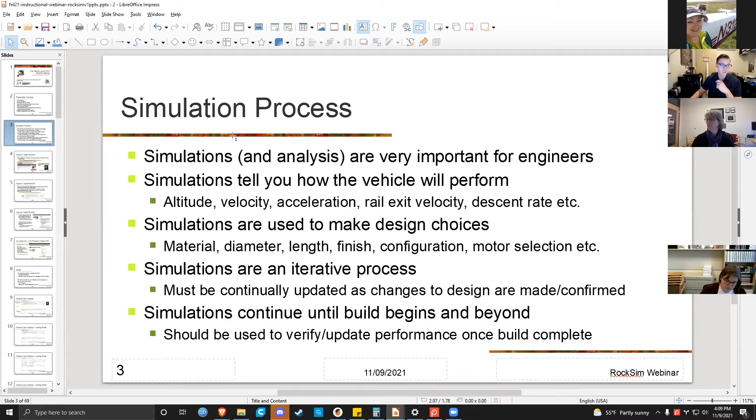So tools like RockSim are extremely useful for launching the rocket in simulation 10, 15, 20 times, and every time just tweaking something a little bit to hone in on the flight parameters that you're looking for out of the rocket. It makes it extremely easy to change things like the material, the diameter of the airframe. It gives you access to a wide selection of different motors that you can plug into the rocket and then just test at your leisure. So generally speaking, simulations are an extremely useful tool, and we are going to leverage them as best we can.

So, acquiring and installing RockSim. RockSim is one of two programs which help you simulate rocket flights, both at an amateur level, so like high-powered rocketry, like the rocket that I have currently sitting behind me right there, a 5-footer rocket. But it can also be used for very, very small model rockets too, the type of thing that you would pick up at a hobby shop.

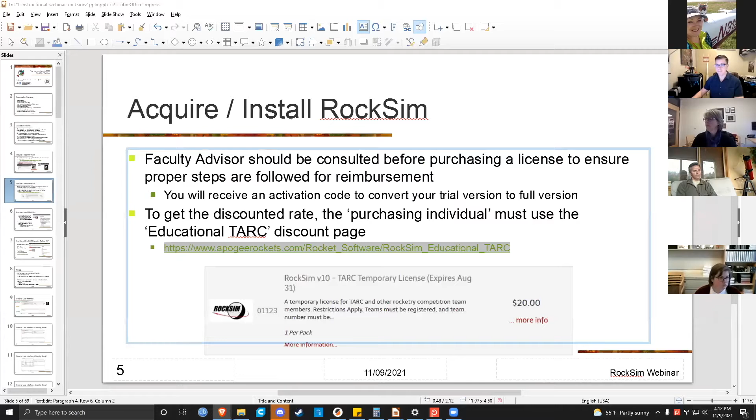So just for clarification, Trent, the license is effective from the day that you purchase it through August 31st of the following year. So these licenses will be good through August 31st, 2022. Okay, yeah, that's great. Thank you, Christine.

More information on downloading RockSim. If you're having any difficulty with this, as you work through that, please get in touch with your supervisor, get in touch with the WSGC staff. But it's a pretty straightforward download. And once you have that downloaded, then you'll be able to use it and play around with it at your leisure.

For today's demonstration, we are going to be using this Loc Precision Caliber ISP demo kit. So again, there's another link here in the slide deck that'll bring you to a page where this model exists and can be purchased. But what's great about this is that there is a database of pre-existing model rockets that we can go ahead and import into RockSim, and this is a fantastic model. I've built this once or twice myself, and this is what we're going to be using as our reference for interacting with RockSim over the next couple of minutes here.

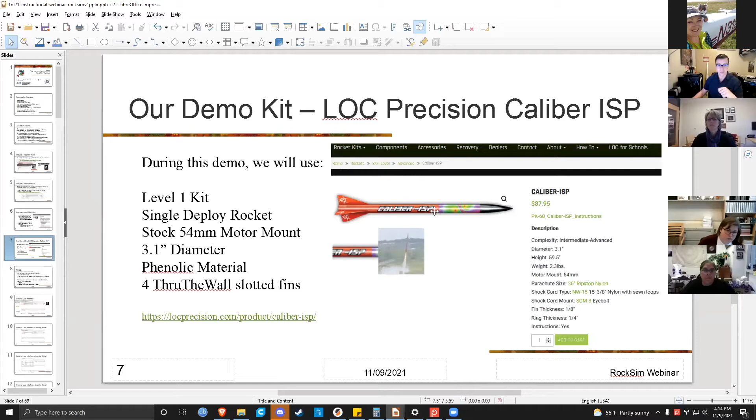Okay, recap. We just talked quickly about downloading RockSim and what the model kit is that we're going to be using in RockSim today. Okay, so the general user interface, and I'm going to start here, but then I'm going to transition to the actual program and then work in the program with you all so that you can see me manipulating things in real time.

I'll go ahead and I'll switch over to the actual application now. Double click this. Cool. And just like it showed in the slide deck, we have a blank interface with our feature tabs up here, and then our component workspace. And currently, there's nothing showing up down here, but in the lower half of the screen, this is where your model rocket is actually going to show up once we have a rocket in the application.

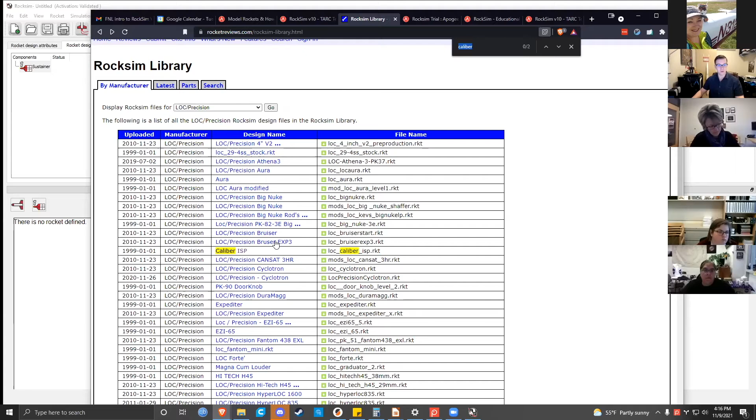So if I'm on this RockSim library, I can filter between the many different companies that produce rocket kits. And if I go to Loc Precision, which I was already on, and I search for Caliber, you can see it's highlighted right here, the Caliber ISP. And if I click this, it brings me to another page here with more information about the rocket. And if I click download, and save, I now have a copy of that rocket saved to my local computer.

So what I can do then, with that saved to my local computer, and it'll probably download to your downloads folder or maybe to your desktop, I can go to this icon up here in the top corner for File Open. And you can see here, this is what I just downloaded, this Loc Caliber ISP rocket. So if I click this and I click Open, here we have a two-dimensional view of that rocket.

And so this lower section here has populated with the entirety of the rocket model. And then this upper area here, this component section, has all of the individual components that go into that rocket. As a side note, I look at things that look very similar to this every day in my day job as well. In my lexicon, we would refer to this components area up here as a feature tree.

And the reason that it's called a feature tree is because there is a branching relationship between components. So for example, if I'm looking at this component here, which is the payload section airframe tube, this component in this feature tree has components that are branched underneath it. So if I'm looking at this airframe tube, which is actually this component down here, if you can see my mouse, the section coupler component and the bulkhead component are housed within that section of the rocket.

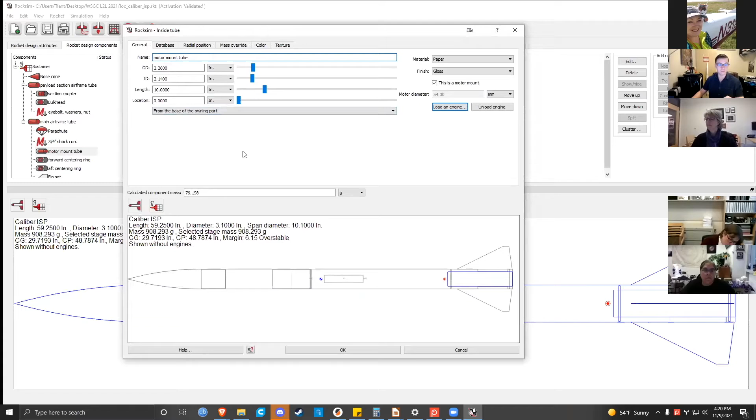A side note here is that with RockSim and with many other programs that are this feature rich, there's always more than one way to do something. So what I'm showing you right now is one way to add a motor to the rocket model, but there are other ways as well. Another way would be, for example, to go into the feature tree here and then find the motor mount tube and then manually add a motor to it from this particular screen, but we won't do that right now. We'll get to modifying these components a little later in the presentation.

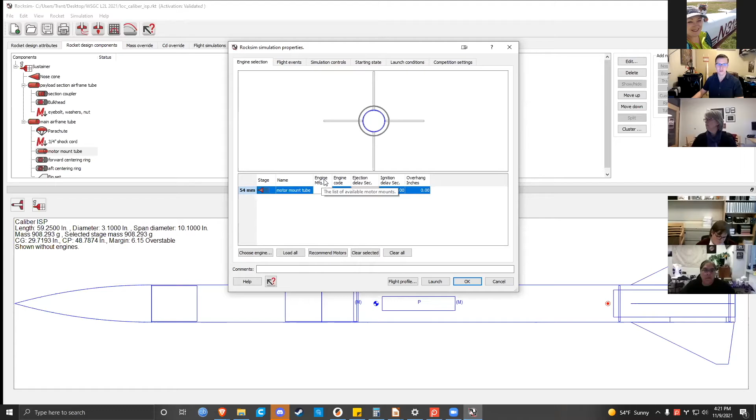So again, I'm going to go up here to this prepare for launch button. I'm going to click that. And up at the top here, we see a whole bunch of tabs again. And the first tab is the engine selection tab. So currently there is no engine or motor. I apologize, engine and motor get used interchangeably quite a bit in high-powered rocketry. So if I say motor and it says engine, I'm referring to the same thing. So what we want to do is go ahead and choose an engine. And so I'm going to click this button right here.

And here's one of the great things about RockSim, which is that it already has big databases of commercially available, ready to buy off the shelf rocket parts and rocket motors. It's not a full list, and we can talk about how to get other motors and other parts into RockSim that currently don't exist here. But for the purposes of this demonstration, there are plenty of engines that exist in this database. And so what I'm looking for, because I know that this rocket has a 54 millimeter motor tube.

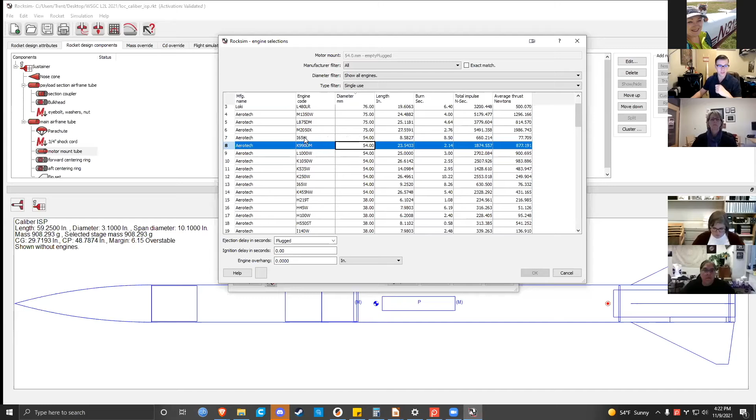And so I'm going to filter by the diameter in millimeters of these various rocket motors. And I'm going to be looking for something with a 54 millimeter diameter, which looks like all of these right here. And I'm not exactly partial to any one of these particular motors. All of them will do for the purpose of this particular exercise. So I'll just go ahead and select this I-65 motor right here, and I'm going to click that, and then I'm going to click OK. All right.

So we see immediately that something's changed. You can see in our simulation properties window, we have this big, oh, okay, I lied, it's not gray, it looks like it's brown. This large brown circle that demonstrates that there is a motor or engine in the back of this rocket. And then also, if I take this away, you can see that our main diagram right here also has a motor shown shaded in there too.

So we know we did a good thing. And doubly, we know that we did a good thing because you can see if you look closely that that motor fits inside of this motor tube. If we were to load in a motor that was too small or too large, then it would overlap that tube, which would not be the end of the world, but definitely would demonstrate that there's something wrong with our design, because in the real physical world, those parts wouldn't go together properly.

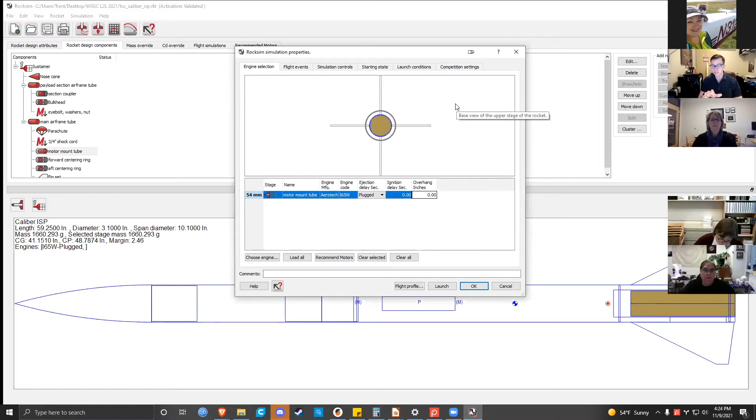So we're almost there now. There are a bunch of different things that you can change in all of these various tabs to alter the performance of the rocket. But right now, what we're focused on is just making sure that we can launch the rocket and that it comes down safely on a parachute. So to that end, I'm going to go over to the Flight Events tab. In the Flight Events tab, there's not much going on here because we have a very simple rocket, but I have an event description that says deploy at apogee.

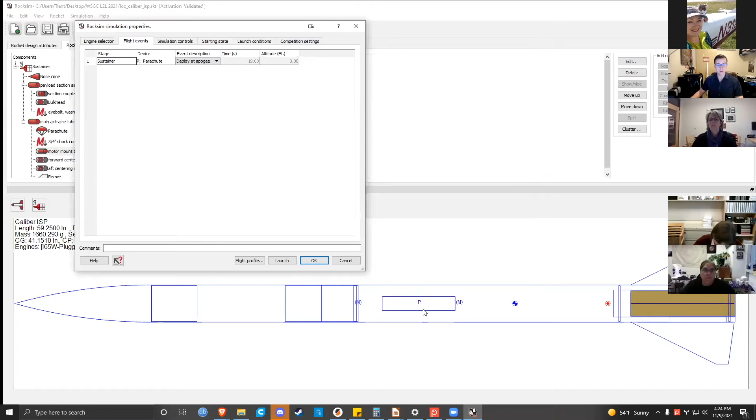What that is saying is that our parachute, which you can see down here in this lower section of the screen as this little square or rectangle with a P in it, when this rocket reaches apogee, or the top portion of its flight, where it starts bending over and coming back down to the ground, it's going to deploy. And in this particular case, that's exactly what we want.

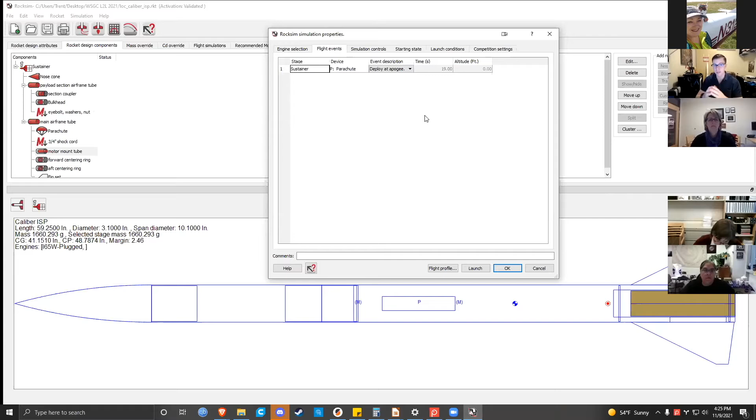In future simulations, maybe we won't want that parachute to come out immediately at apogee. Maybe we'll want it to come out a couple seconds after, or even specify a specific altitude, because one of the problems with deploying a parachute at apogee is that if the rocket is flying really high when that parachute comes out, that rocket's going to travel a very, very far distance away from you before it actually lands. And we typically try to not let our rockets drift miles and miles, one, because it becomes difficult to find them, and two, because I don't like walking.

So we have deploy at apogee set. I won't click OK to that. I'll move on to the rest of the simulation controls really quickly. Nothing in particular I want to change on this tab. This is high level stuff. The starting state tab, this one's interesting. This one allows you to change the length of the launch rail that your rocket is launching from. For our purposes, 72 inches is more than adequate. And also the launch angle too. Launch angle and this little dial that I can twist around left and right is a very useful tool.

Because one of the things that's going to be very useful in your simulations is dealing with the effects of wind on your rocket. If you're trying to hit a particular altitude or get your rocket to achieve a certain behavior in flight, the wind is really going to mess with your rocket's trajectory, because these are not actively guided rockets. These have passive guidance in that they have fins. So by and large, we are at the mercy of wind many times. And so changing things like the launch angle, provided it's within a safe margin, is something you can do to alter your flight's behavior.

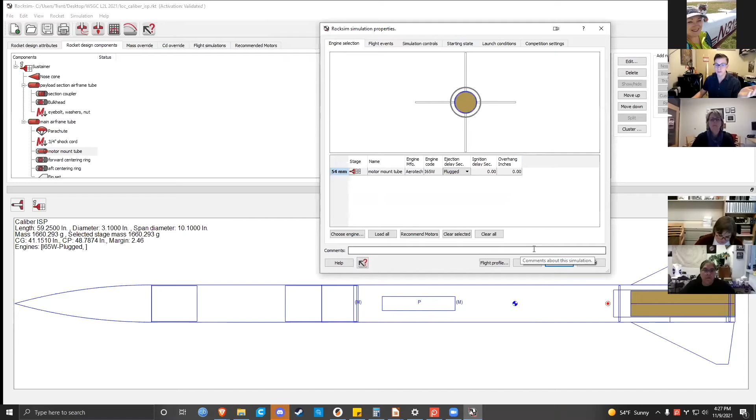But for right now, I'm going to set this back to a value of 0. Oops, cancel that. And at this point, I'm set. I've been extremely long-winded, but effectively all we needed to do was load in the rocket model, load in the motor, and then we can hit launch. I'm going to hit flight profile instead of launch because it's going to bring up a screen that shows a video interpretation of what the rocket's flight looks like. So if I click flight profile,

it brings up this 2D flight profile, and the simulation's already run. It took a second there to run the entire simulation, but now we can watch that simulation. So if I click the play button down here, you can see our rocket launching.

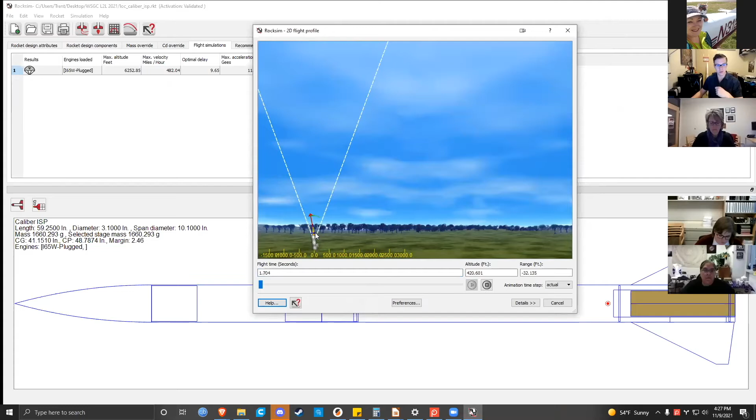The flight time in seconds, as well as the altitude. If I hit this details pane on the side, it'll give us a lot of information about accelerations and velocities and the drag coefficient, all sorts of useful information.

And I can actually slow down this simulation as well by going from animation time step down here and then setting it to, let's say, 0.01 times the true speed. And let me back that up a little bit so that I hit play again. And you can see that it is going very slow right now. And this gives you an opportunity to take a closer look at some of the data values that are showing up on this side screen right here.

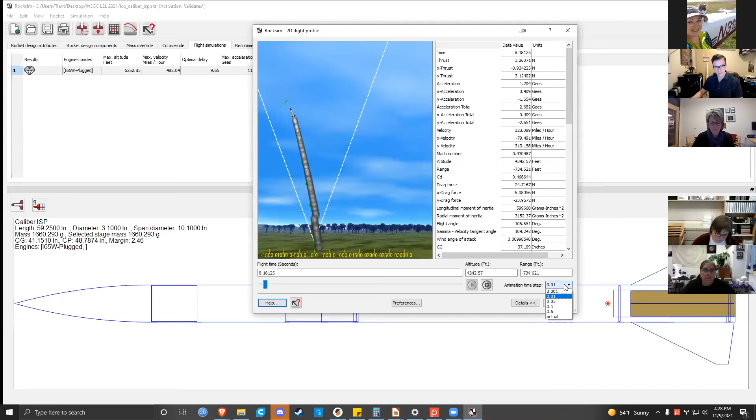Set the time back to real time. And you can see that our parachute, just like we told it to, deployed at apogee. And so if we were to sit here and wait for this thing to land, it's going to take a very long time because now that that parachute's out, the descent has slowed to such a rate where it's going to drift for a very long period of time.

And if I take this slider down here for the time and then drag that out, you can see that it looks like it's going to be landing approximately, assuming that that is feet, about 3,000 feet away. So a little bit over half a mile away from the launch site. And this is on a nice day where there isn't a significant amount of wind. Wind being one of the parameters that you can change when setting up your simulation.

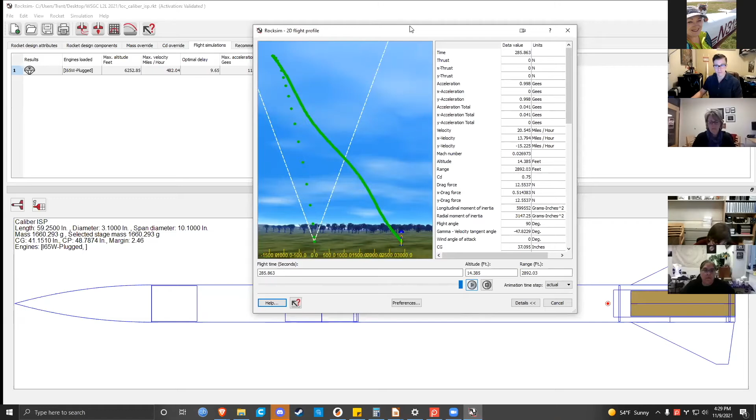So if I go ahead and close this down, you can see that something new has showed up on this feature tab called Flight Simulations. And this is what we just ran. The useful information here is that you can see underneath the results section right here, there is a parachute icon. If you see a parachute icon, that's typically a good thing because that means that a parachute has deployed and the rocket has more or less successfully landed.

If you see an icon there that looks like a sideways rocket with a big X through it, it means that something probably went wrong. And you might need to rerun that simulation or rethink the design of your rocket because your rocket probably did not land in a safe manner. In addition to the yes, no on safe landing of your rocket, it gives you information about the motor that was used, as well as a bunch of general information about the performance characteristics of that flight.

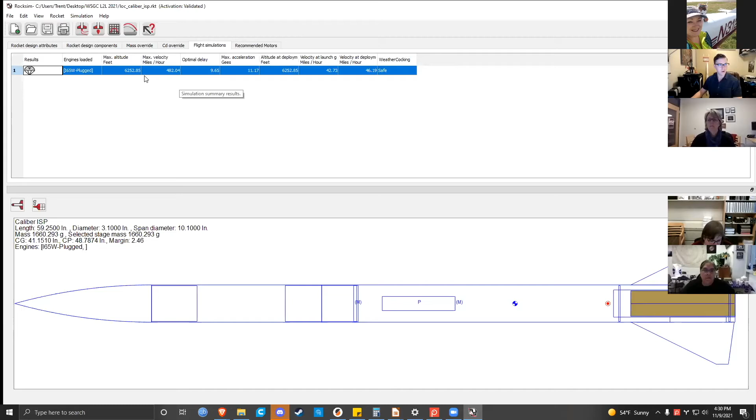But we're going to want more information than that. So what I can do here is, because this is highlighted right now, I can go up to this plot graph button and click that. And then here I can set up a graph of a billion different things, not that much, a lot of different things to graph the function of that rocket over time.

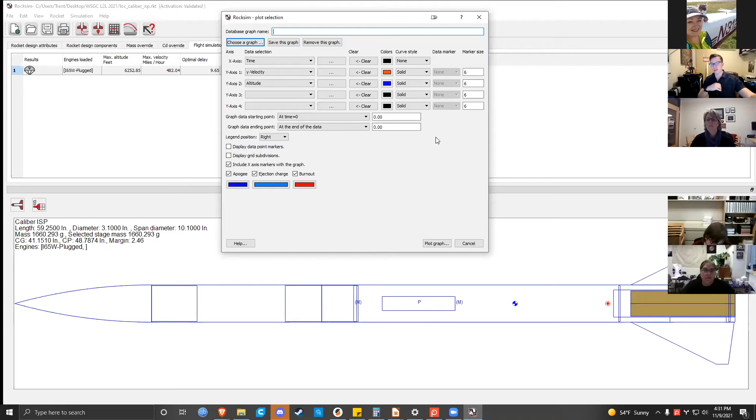We're not going to change anything in here though, because what RockSim has already done for us is populated the most useful and most commonly used data points for graph plotting, which is time versus the velocity in a vertical direction, as well as the altitude off the ground. And so just by hitting plot graph down at the bottom here, you can see what this rocket's flight profile was. And this is a textbook flight profile for a beginner's rocket.

You can see that right at apogee, the parachute came out, and then immediately after the parachute coming out, we have this very, very slow, steady, gradual descent down to the ground. And what I can do here is, you can see my cursor is turned into this little plus sign. I can go ahead and drag select over an area like so to get a much more up close view of what's going on here.

Here along the x-axis, or the bottom axis, you can see time. And then the various colored curves here are our velocity, which is given in miles per hour. So it looks like we hit a velocity of somewhere in the range of 450 miles an hour with this particular rocket. And that was just with me picking a motor out of the blue. I was not anticipating a particular speed.

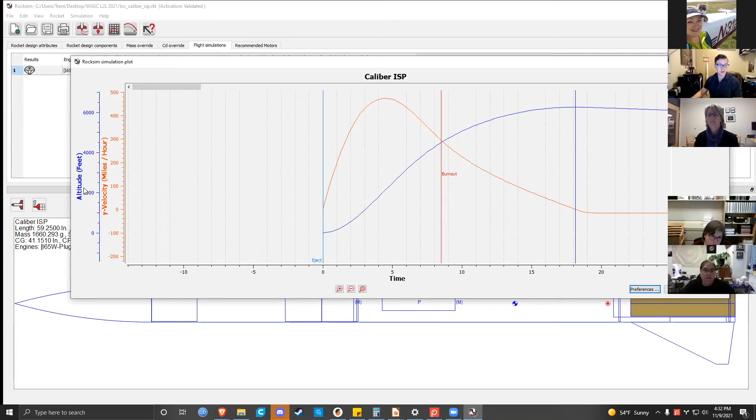And then also on the blue line here is the altitude in feet. So it looks like we were cresting right above 6,000 feet. So this was a pretty high flying rocket, in particular for a beginner flight. But we did good. Other notable items here is that it has given a vertical line here for when the motor burnout is. So this is the point in time where there's no propellant left in the motor. And from this point on, the rocket is just coasting up to an altitude and then tipping over and then coming back down to the ground.

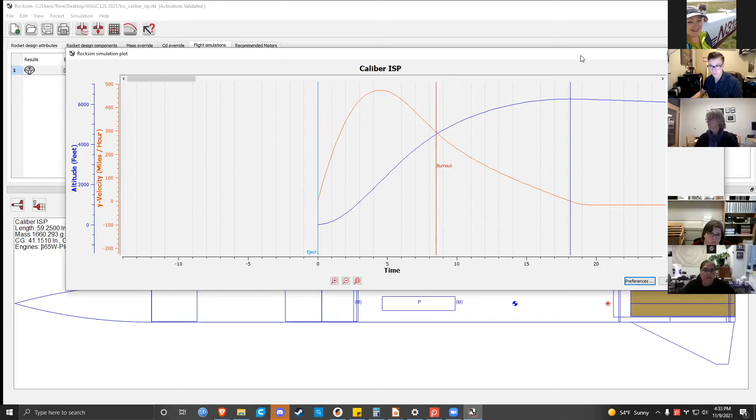And that's it. We have effectively accomplished our first goal, which is to go ahead and run the simulation with a rocket.

And if you're following along at home, if you have any questions, feel free to go ahead and unmute yourself and talk in the chat. Otherwise, I'll just take a minute here to sip this LaCroix and then we'll keep going.

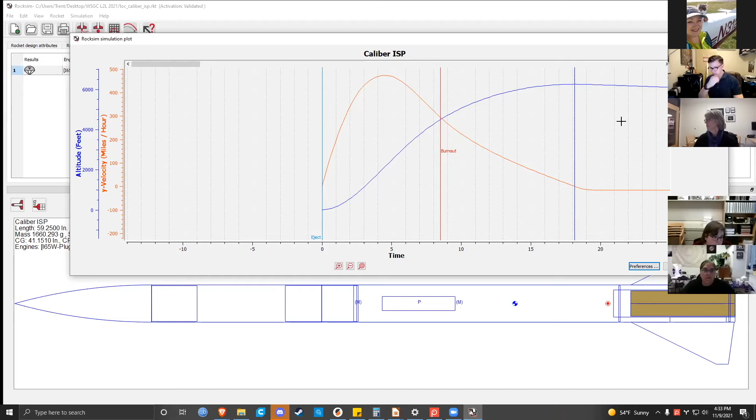Okay, let's take a look at the presentation and see how far we got. So I have a question. Yeah, go ahead. How often should we run a simulation for our rocket? Just like 2 or 3 run-throughs so we know what's going on, or? Sure. The number of simulations that you run for the rocket really depends on whether or not the simulations that you got the first time around were things that you liked.

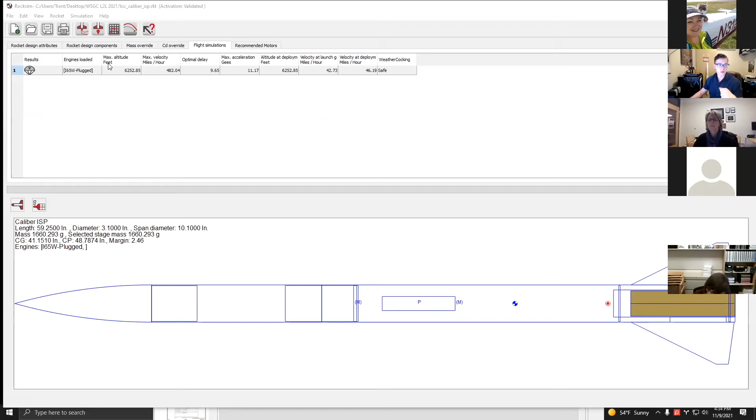Now, that being said, you need to make sure that your model is correct too. So if I move this over to this side again, you know, we ran this one simulation and it landed safely and everything seemed great. But again, if I open up the results from that simulation, you can see here that the rocket is going to be landing very, very far downwind from where we started. And if it's a clear day and it's a bunch of flat ground and you and your team don't mind walking, then that's probably not a problem.

But if you are very uncertain about what the weather conditions are going to be for the day of the launch, or you don't have a good feel of what the launch site is going to look like, then you may want to modify your rocket, or perhaps select a different motor, or perhaps change the size of your parachute to make sure that that rocket comes down quicker than what it previously was with this simulation.

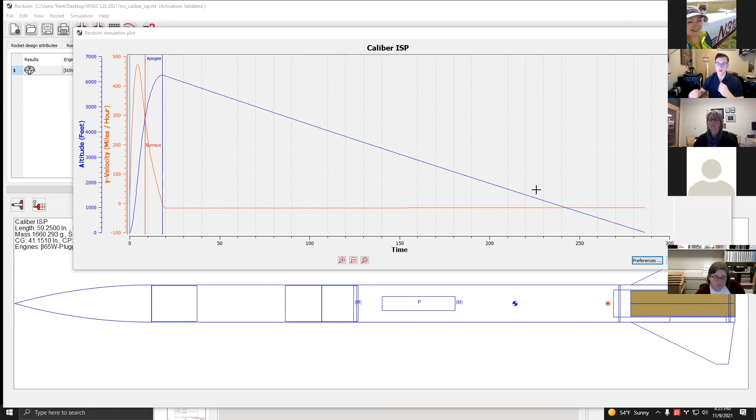And that is where the iterative process of running simulations really comes in, because then I think to myself, okay, well, what if, for example, I'll close this down and I'll go back over to our rocket design components. What if I took this parachute and I made it smaller? And that's a really good segue into how to modify the various components that you see in this feature tree. I can start by just double clicking on this parachute right here. And a screen comes up here.

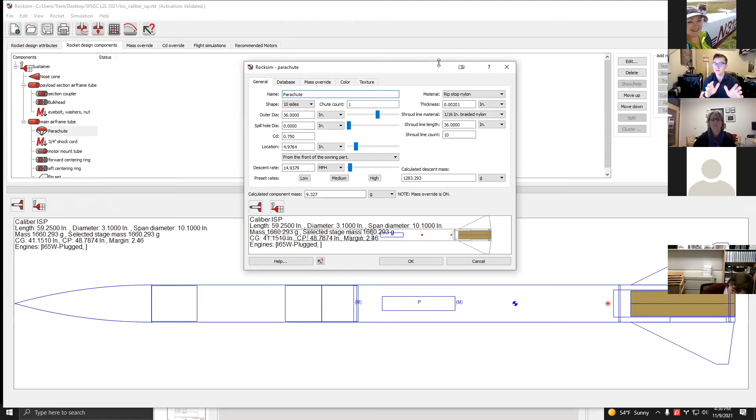And don't be intimidated by this, because as you probably discovered, every time that you click a button in RockSim, it gives you 15,000 different things that you can modify. And it's important to remember that in order to at least run your first simulation, you can get a general understanding of what's going on with your rocket. It's, oops, what happened to my screen right here?

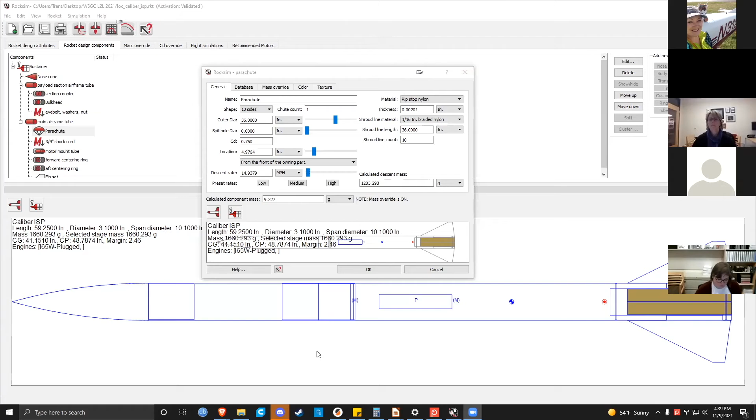So while we're waiting for Trent to be able to get that back up, does anybody have any questions? So a reminder that for each one of you, purchasing the student version. The student license, I believe, is $20, and that can be incorporated into your budget so that every team member that you want to have that available has it. I believe for the Mars and the Moon challenges, you will need to submit a RockSim file with each one of the design review reports.

Okay, I'm back. Hopefully this time to stay. So finishing that thought from the question was, you can go into the individual components and then modify them. And you have a ton of different liberties to go ahead and modify those components. So for example here, I can change the diameter of that parachute from what it's currently set at as 36 inches down to, let's say 25 inches. Actually, let's be really generous here, and let's see.

Chris, do you want control of the screen? I don't need control of the screen. Okay. It was when you blacked out.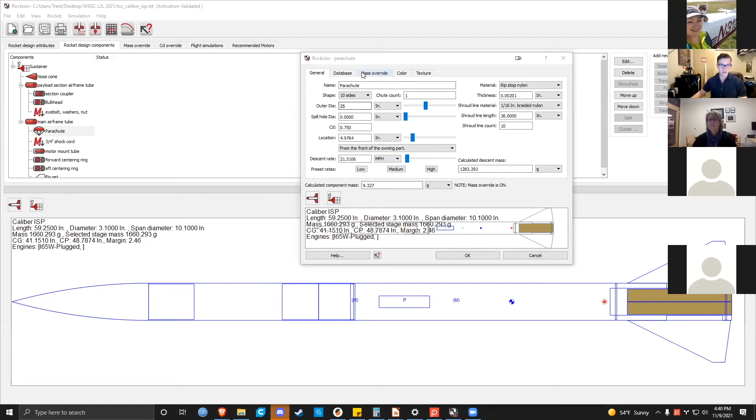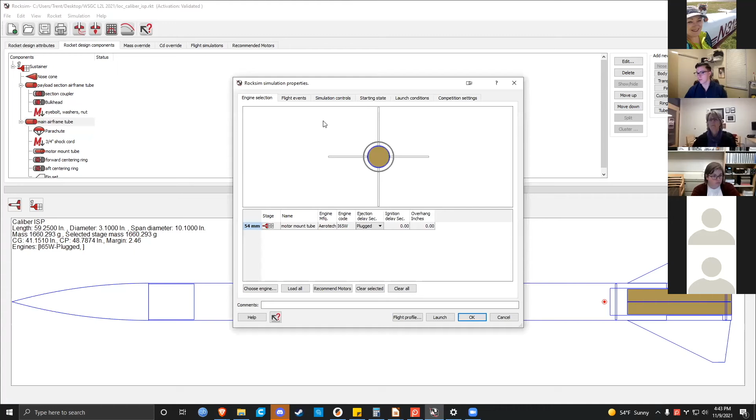Gotcha. Let's be really generous here, and let's make it a 12-inch diameter. And again, the way I did that was just by going into this components tree here, this feature tree, and grabbing the parachute, double-clicking it, and then all of these different parameters for dimensions come up, and I changed it from 36 to 12 inches. So if I click OK, and then go, the same way that we did before, to prepare for launch, and we're not going to change anything in here. We're just going to launch the rocket again, and then compare the results.

So if I go ahead and I graph this, you can see that the parachute came down at a significantly faster slope than previously, which indicates that the rocket came down quicker, and thus the rocket did not travel nearly as far.

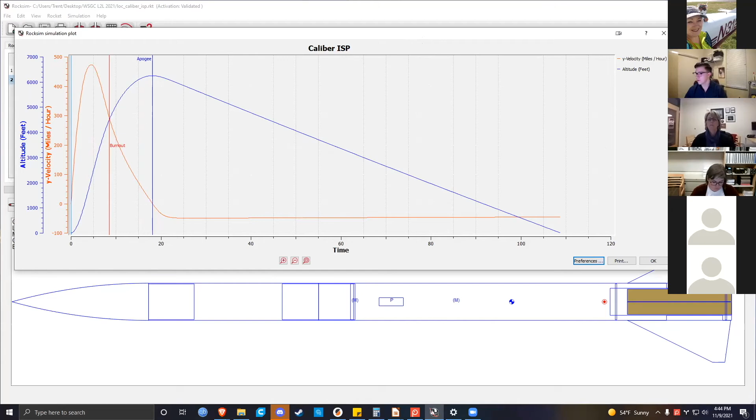So that's a good question with regards to what causes us to iterate with the simulations in the first place. When we put our rocket into RockSim, we can modify all of these different components that our rocket has, so we can get to the parameters of the competition. That's right. Yes.

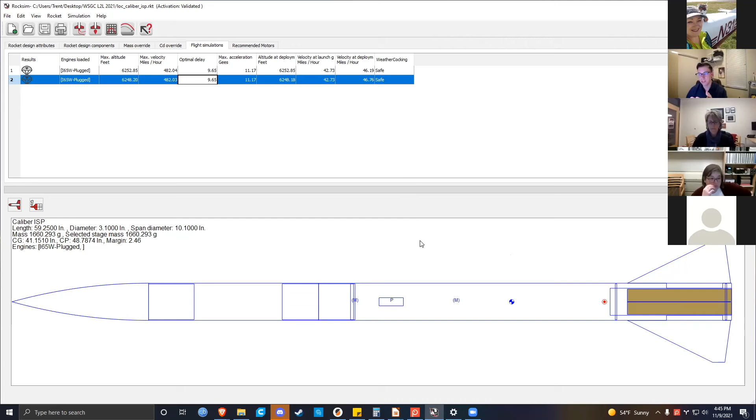So another example would be perhaps you are trying to get to a particular altitude, but no matter what you do, you stuff the biggest motor that you possibly could into this thing, or maybe you're limited in which motors you can select from, because for the competitions that I was in, we usually had a very select number of motors that we could choose from. And so weight savings was a huge thing. We often had to figure out how to make our rockets lighter so that they could reach a particular altitude.

And so for something like that, going back over here to the rocket design components, there are two ways you could attack this problem. The first of which is to dimensionally change some of the components associated with your rocket. So for example, if I was dealing with a kit like the Caliber ISP, one of the easiest ways to change the weight of the rocket is by adding or removing sections of body tube, or modifying the bulkheads, or the wooden rings that are inside of your rocket.

So let's take a look at this main section down here, which in the terminology of our current component layout is called the main airframe tube. If I double click on that, more parameters come up. It tells us the outer diameter is 3.1 inches. We're not going to change that. There's no real easy way to change the diameter of a tube aside from replacing it, and replacing it costs money if you've already bought the kit.

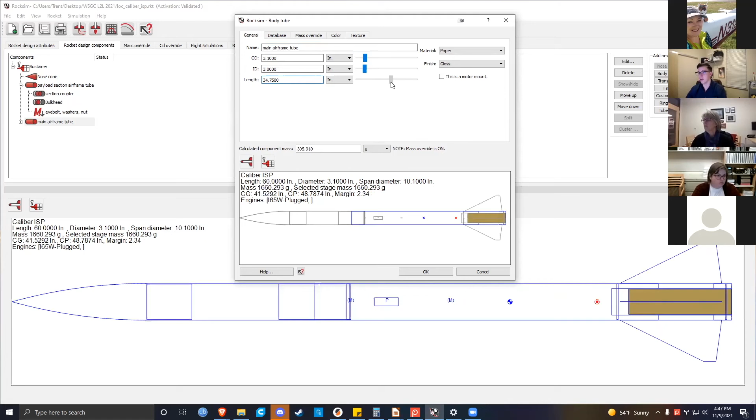And watch as I move this slider, both in this small representation of the rocket as well as the big one down below, the size of this airframe is changing. And you'll notice that the fins are not moving with it. We can change that too at a later point in time. Right now I'm just demonstrating that I can make this very short or very tall, depending on how big I want to go. And you'll also notice that the motor and the motor tube are currently moving with it.

And then we think to ourselves, well, why is that? Why are those components specifically moving with that? Well, it's because, remember, feature tree: all of those components that were moving with the main airframe tube are currently branched off of the main airframe tube. You can see the little indentation here. It's just like a folder structure.

Now, the reason why those fins aren't moving with it probably has something to do with the fins currently existing outside of that tube and not inside of that tube. There may be a way to rework this model so that the fins do move with the body tube, but currently it's in a position where you would have to move those manually.

Another thing that you're probably going to need for your competition: I highly doubt that any of you are going to be running dumb rockets. And when I say dumb rockets, I mean a rocket that doesn't have some type of electronic instrumentation in it. Now, currently, if we look through our components here, there is nothing in here that says altimeter, Arduino, or any type of electronic component.

And it's not only the electronic components that add weight, but it's also batteries too. And batteries can get significant, very heavy if you're not too careful. You know, even something as small as a 9-volt battery can really affect the flight of your rocket, especially if you have multiple of them. So let's talk about that for a second, because this will be a great example of us adding something to the rocket that currently doesn't exist and that you would need to have in there.

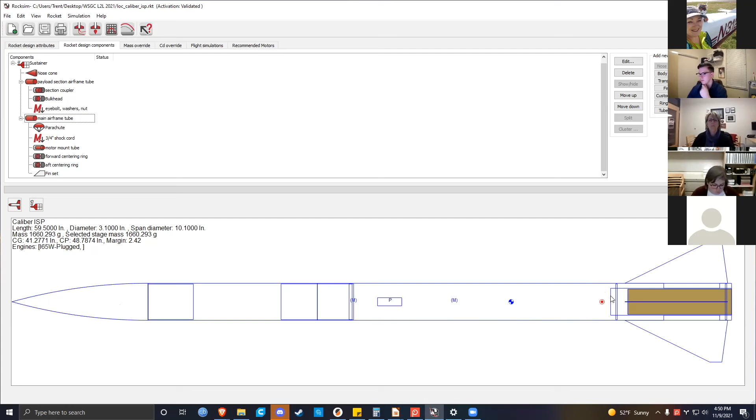So when I look at where electronics would exist in this rocket, there are a couple places that they probably could. The first place you could put them would be in the nose cone. A second place you could put them is somewhere down in the lower chamber here, maybe attached to your parachute, or maybe connected in some way to an eyebolt down by the motor. But the most common place to put your electronics, and arguably the safest place, will be in this coupler tube right here that connects the upper half of the rocket to the lower half of the rocket.

And if I go over to this section over here in the corner that says add new components, I have a whole bunch of different options. But you'll notice that there is no specific option that says electronics or Arduino. And for the purpose of adding those very specific components, there's one button called mass object. And you can see actually that we already have a couple of different mass objects that are in this assembly. You can see them because of this little M with the parentheses around it.

But if I want to go ahead and add a mass object, and in this particular case, the mass object is going to be, let's call it the battery and electronics, just as like one big bulk item. I'm going to go ahead and select which component on my feature tree I want that mass object to be branched underneath. And then going over here to the corner, I am going to click mass object.

Now, RockSim wants to be very helpful. And so what it's going to do, before it allows you to input information about how much that mass object weighs, is bring up another database, similar to the database that we saw for rocket engines. But in this particular case, it's trying to think of all the things that RockSim would qualify as a mass object. And so it looks like we have motor retainers in here, we have metal quick links, we have screws, eyebolts. None of these things are really interesting to me right now, but they will be at some point to you, perhaps, when you're trying to find and add components to your rocket. Right now, I'm just going to click cancel.

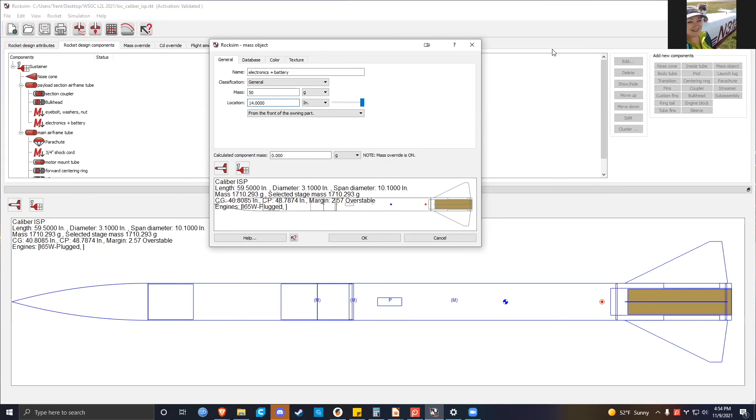And then it's going to give me the option of location. So by default, it's going to start the location at 0 inches. And that's 0 inches starting from the top of that parent component, which is this payload section airframe tube. So I can go ahead and put in a number manually here, but I'm just going to take this slider and we're going to drag that. You can see it moving down here at the bottom, that little M. I'm going to go down, down, down until it gets right to the center of this coupler tube, because that is where I want that component to exist. And I'll click OK.

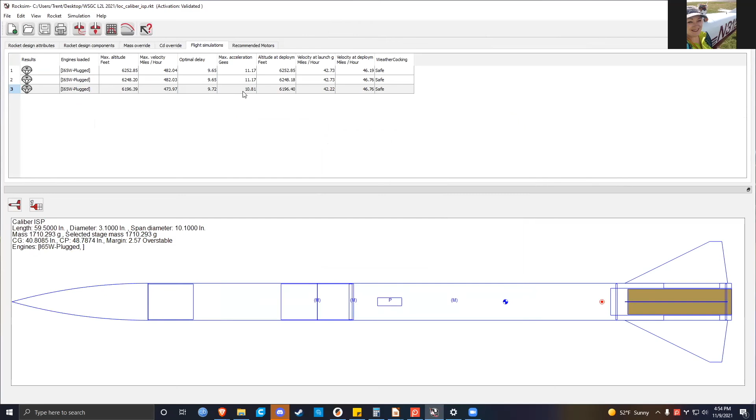And then what I would do, and this ties back into the iterative process, I can go back up and I can prepare for a new launch with this slightly modified version of my rocket. Click launch. And now I have a third simulation down here, which I can go ahead and plot the values from.

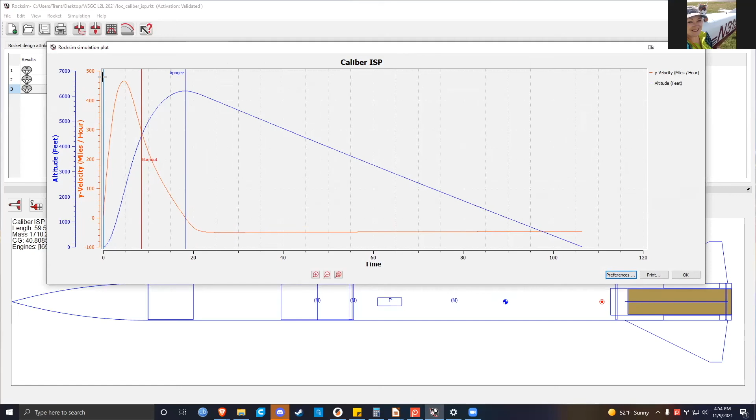Now, I did not add that much weight, and I guarantee that there's a difference in the altitude and the flight and the velocity, but you would have to zoom in pretty close to see it. And for your reference as well, if you want to see these all side by side with each other, I'm sure that there's a way to do that within RockSim, but you can also print these too.

And if you click that print button there, then it'll print either a picture or a PDF format of this graph that you can then save, and then you can use it in your documentation or your reports or your PowerPoint presentations, whatever is necessary to document and demonstrate. Those are the 2Ds, the document and demonstrate the flight characteristics of your rocket.

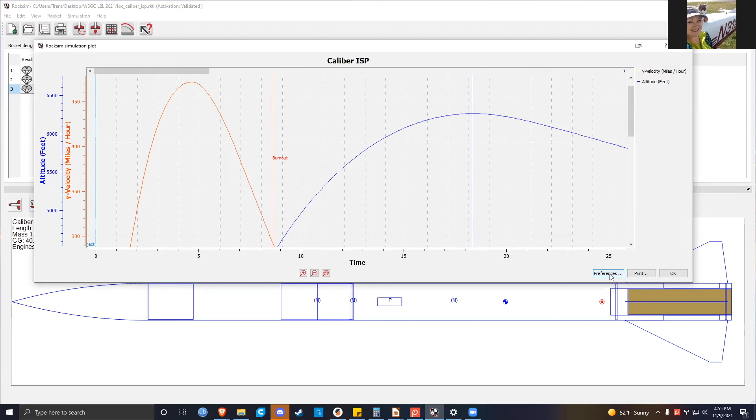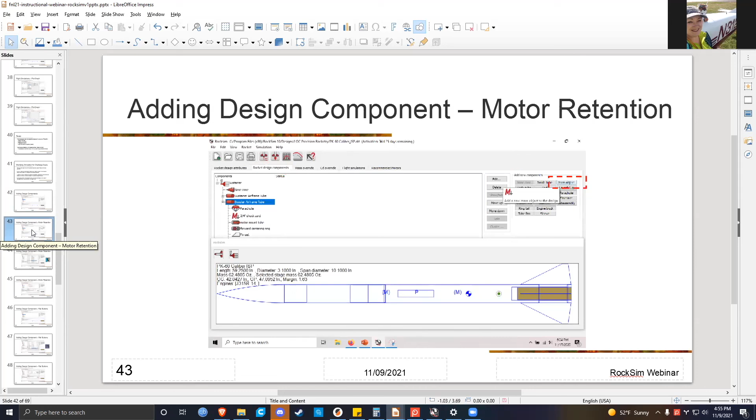So let's take a look back here at the presentation. Okay, choosing engines, flight simulation, display details, flying the rocket and seeing the 2D flight profile in real time. Yeah, I think that we have covered most of the basics.

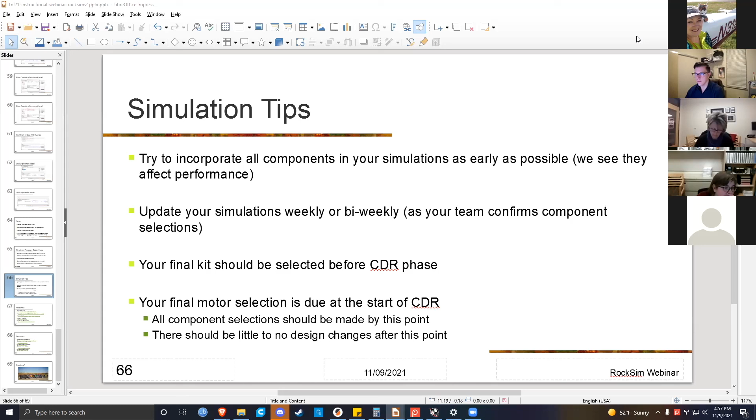And so as Trent was going through and showing you the different rockets and how to put that in, that should all be pretty static. You shouldn't be making any changes at that point. So your RockSim should be pretty good, unless I'm misspeaking in any way. Nope. Okay.

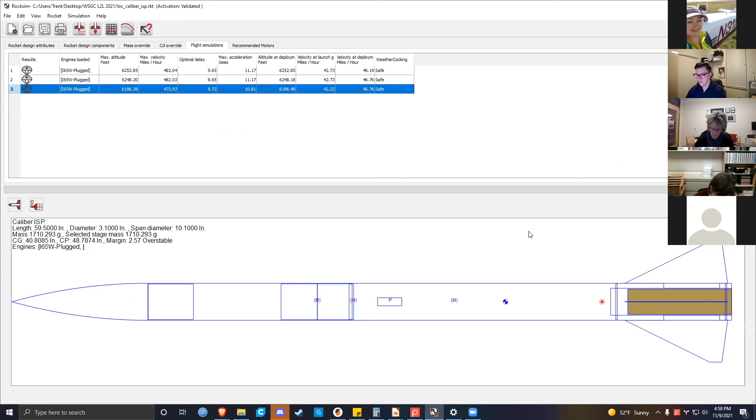I'll let you go back to the screen, PowerPoint, Trent. Oops. And then the next screen, please.